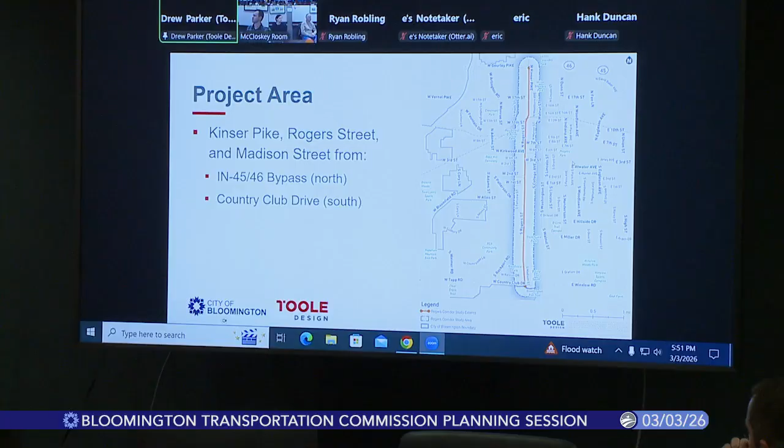Starting with the project overview, Hank covered this verbally, but the project extent we're looking at is the Kinser Pike, Rogers Street, and Madison Street corridor from the bypass all the way down to Country Club Drive. You can see the corridor extents map here on the right.

The way it's been communicated to us, the purpose of the project is to evaluate existing conditions and make recommendations for design changes to improve safety along this corridor. So this is, to us, really a safety project. It may achieve other goals, but first and foremost this is a safety project housed under the Safe Streets for All plan. We really want to focus on the long-term vision for design recommendations, that 10-year window, but also think in the short term about rapid implementation projects we can do with quick build materials to achieve some of those same goals.

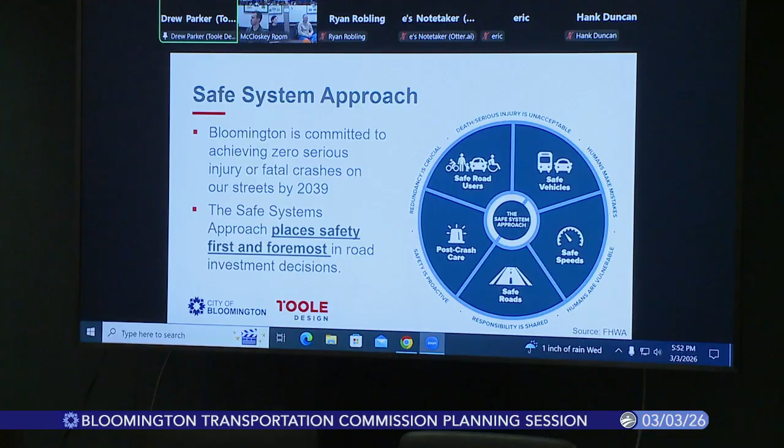Like Hank said, you all have adopted Vision Zero for 2039, meaning we're trying to eliminate serious injury and fatal crashes by then. So this is one corridor within the overall citywide street network where we're starting for this study.

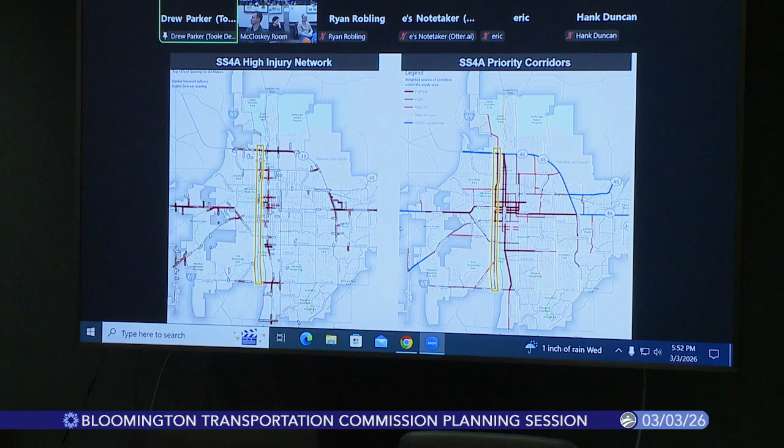Hank mentioned this as well - on the left side here you can see the citywide high injury network, where those serious injury and fatal crashes occur most frequently across the city. Especially along the northern end of this corridor, there's a higher frequency of those types of crashes. When you look at the priority and other factors Hank mentioned, this corridor, especially the northern end, really rose to the top as the highest priority, or highest tier of priority.

To give you a sense of the project overview, we started work in October, beginning with data collection and corridor analysis, which we've just recently completed in a draft form. Also coming up with the vision and goals. Our next steps as the project advances are to develop design alternatives and then move into a concept design, compiling that into a final corridor study.

Like Hank said, this is our first Transportation Commission meeting. We will have a meeting during workshop week, that week of March 23rd to the 27th, and then we expect a few more Transportation Commission meetings later in the spring and summer. Our public engagement will be, like Hank said, focused on that workshop week to get as much engagement as possible all at once. But we'll also have an online survey open for a month, so if people aren't able to attend those events during that week, they'll be able to engage via the project website as well.

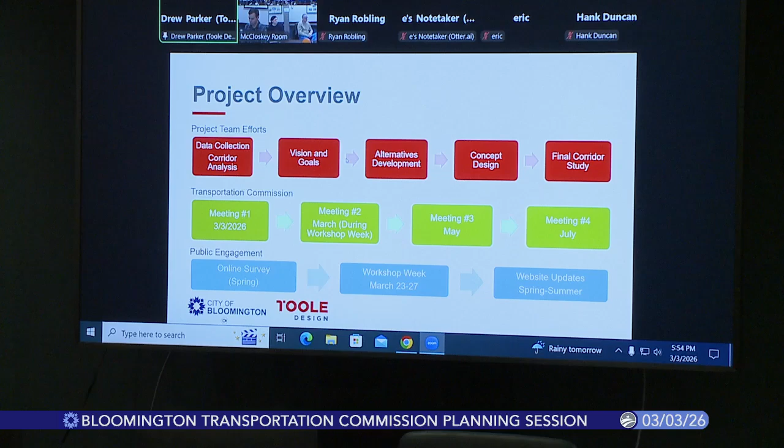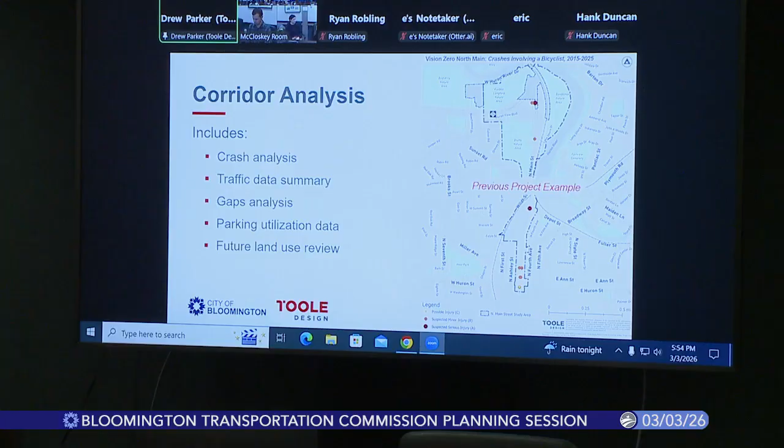I feel like I'm repeating some things Hank said, but sometimes it's good to hear things multiple times, at least for me. The corridor analysis includes crash analysis and traffic data, a gaps analysis, parking utilization data, as well as future land use review. We'll go through that in the second half of this presentation.

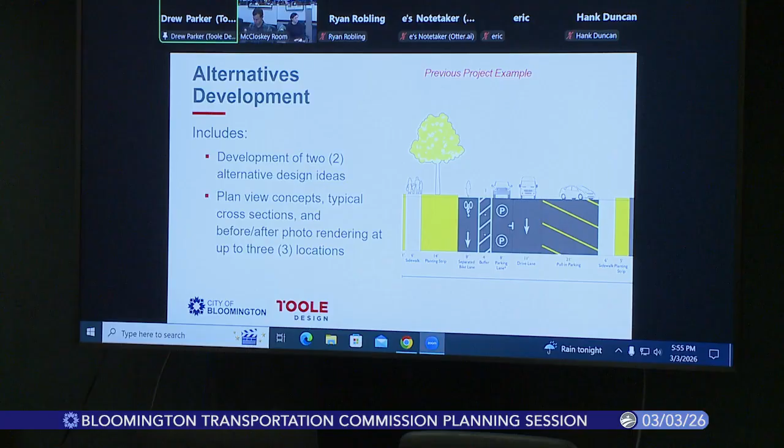For alternatives development, our goal is to come up with 2 alternative design ideas, which could vary depending on different context zones, since it's a really large citywide corridor that differs depending on which section you're in. As we develop those alternatives, we'll create cross-sections - you can see this example on the right, just from a different corridor design project - and come up with multiple alternatives and plan view concepts to show. We'll then evaluate which alternative we think meets the project goals and design objectives the best.

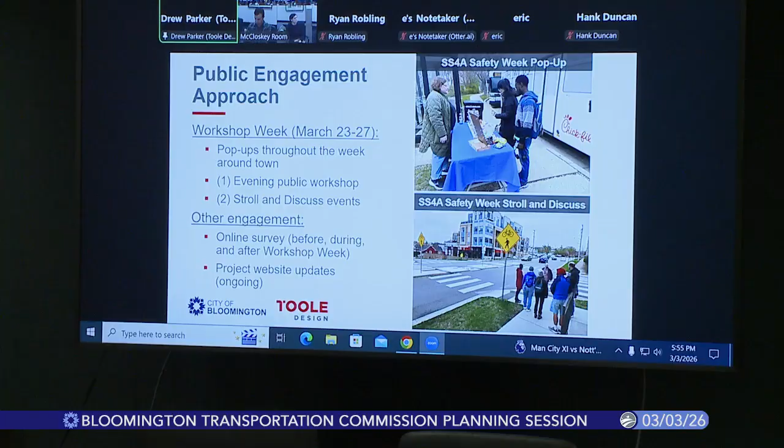And then our public engagement approach, as mentioned, is really focused on the workshop week. You can see these couple of photos from Safety Week for the Safe Streets for All plan, where we had stroll and discuss activities and pop-up activities where we're just trying to meet people where they're at, do a quick 30-second activity, give them a snack, and send them on their way. It's a nice way to get quick feedback if people don't have time to come to a public meeting for an hour.

All right, so that covers the overall project overview at a very high level of what we will be doing from now through the summer. The next section I want to move into is the project vision statement, goals, and design objectives. These are in draft form, statements that we've come up with working with city staff. We're really looking for you all as commissioners to provide feedback on whether you think this is headed in the right direction, and if you agree with the vision statement, goals, and design objectives.

So the vision statement that we've come up with is: the Rogers Street, Madison Street, and Kinser Pike corridor will become a safe, accessible, and connected multimodal street that supports existing neighborhoods, advances Bloomington's values, and guides future growth towards walkable, people-centered places.

So you can see it's really focused on safety first, but there are all these other goals that we're trying to achieve with the corridor study, which is really taking a broad look at the corridor. I'll run through the goals and design objectives, and then we can pause, and I'm happy to move back and forth between these slides to talk about each of these with you all.

So as far as goals, we have 6 goals intended to support this vision. The first is to eliminate fatal and serious injury crashes, which we'll do through street design changes that we know can help reduce the chances of those crashes. We also want to support multimodal travel for all ages and abilities. We know this is an important north-south corridor that connects throughout the city, so we need to ensure our concepts support travel for all modes and for all ages and abilities.

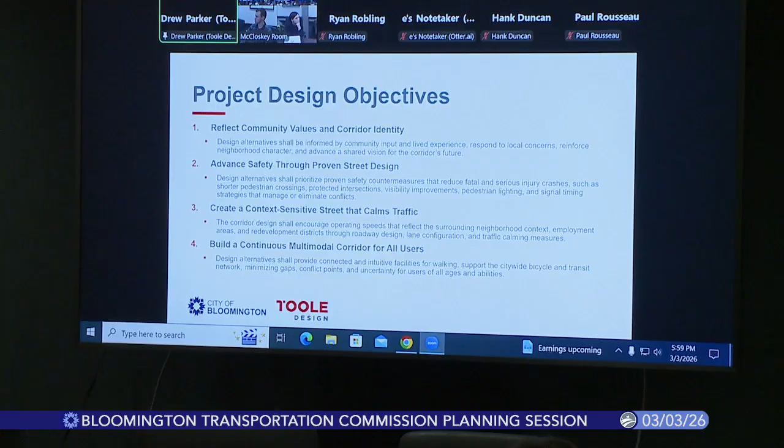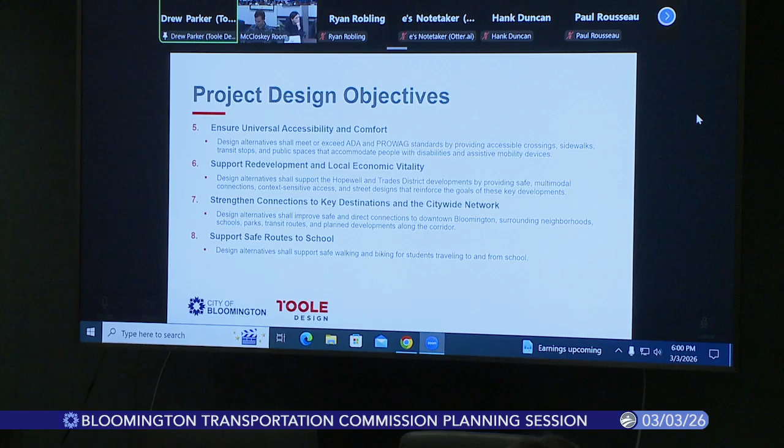The fourth is to build a continuous multimodal corridor for all users. The fifth is to ensure universal accessibility and comfort. The sixth design objective is to support redevelopment and local economic vitality. The seventh is to strengthen connections to key destinations and the citywide network. And the last design objective is to support safe routes to school. Each of these design objectives can be evaluated, and we can say whether or not the alternatives we're proposing are achieving one or all of these 8 different objectives.

The next thing I wanted to mention is that staff have already taken a cut at splitting the corridor up into different context zones. As people have mentioned, it's very different along the corridor depending on where you're looking. So city staff have already, at a draft level, said these are what we think are the 4 different context zones within this corridor.

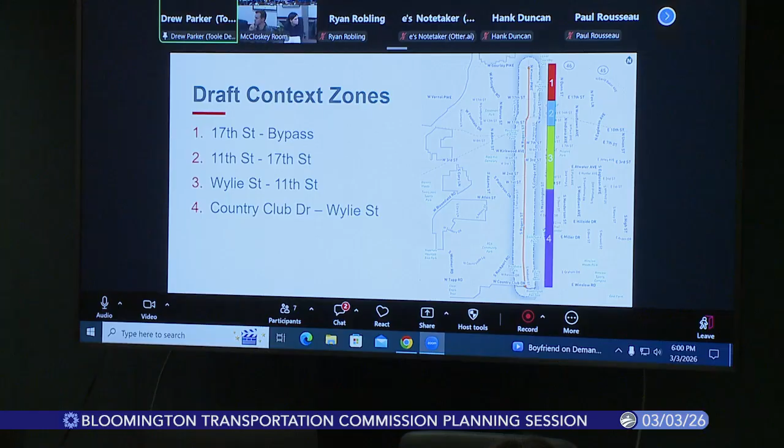The first section is the area north of 17th Street to the bypass. The second area is from 11th Street to 17th Street. The third area is from Wylie Street to 11th Street. And the fourth area is south of Wylie Street down to Country Club Drive.

I know there's a lot of information to throw at you all, but I want to pause there and see if folks have initial thoughts on any of those things that we just presented, and we can start wherever folks want to.

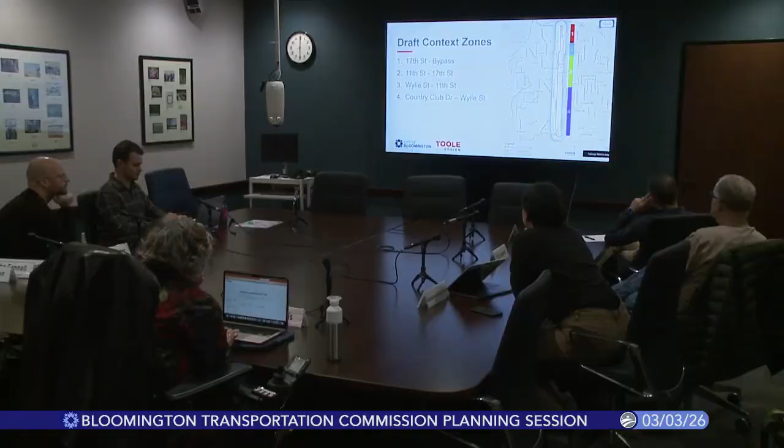May I jump in? Yeah, thank you so much, Drew, for this presentation. Would you mind going back to your previous slide where you show the 4 segments? I think commissioners would maybe just like a moment to take a look at these 4 context zones for just a second. Absolutely.

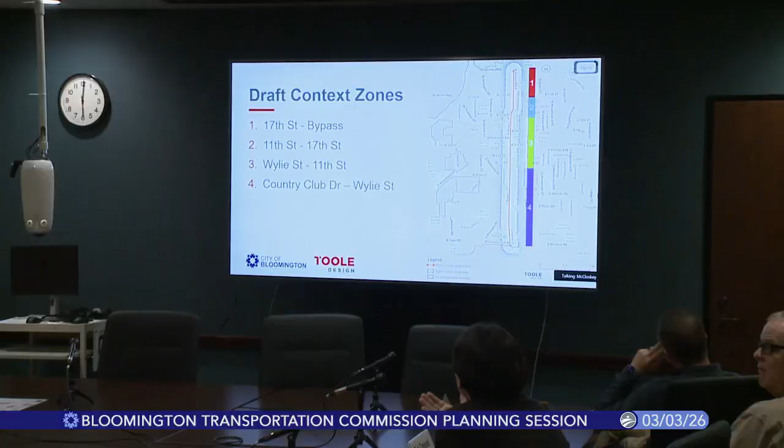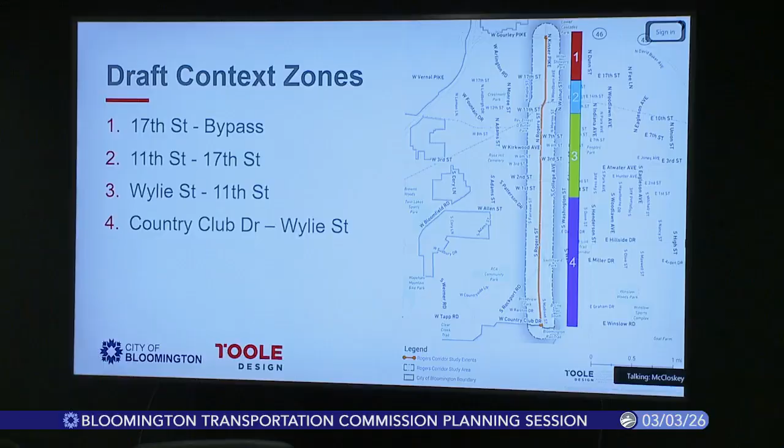As a follow-up, I think I would ask maybe if you can give more context on how they were originated, what is the reason behind them being like that? There's no perfect answer here, and this is very much a back and forth. These are the context zones and this is what we're going with. If you have other feedback, please give it to us. Essentially, how we defined it, I'll start south and go north from there.

From Country Club up to Wylie, it is almost primarily residential. There's some businesses over there, but it's residential, and that's where you see less of that downtown, more urban context, and it feels a little bit more suburban. You have long stretches without crossings in there or major intersections. You have a couple with Patterson, or what is it? Rockport, thank you. But it's not too many.

But then once you get into that third section, the Wylie to 11th Street, that is your downtown area. Wylie is where the Hopewell development begins, where you have the new police station, where you have these businesses coming up, and you have just a much denser urban context going through downtown.

And then 11th Street to me is that barrier of, okay, you are leaving downtown and you're entering more of a residential space again. 11th to 17th, this is a smaller context zone, but to me that is an area that is delineated on both sides by 17th and 11th, where it feels different south of 11th and it feels different north of 17th. And then 17th to the bypass, again, you could arguably combine those top 2, 1 and 2, into one, but to me they just feel a little bit different than each other.

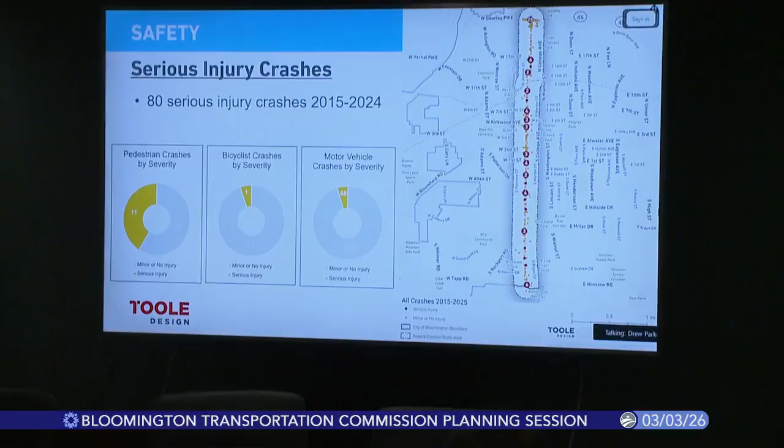There's quite a bit of information here, but we'll start with safety, since that's our number one priority, this being a Safe Streets for All type project. So to start with the safety analysis, we looked in more detail at 10 years of crash data. In that 10-year period, there were 80 crashes that resulted in serious injuries. There were no crashes resulting in fatalities along the project corridor extents. That's a good thing, but there were still 80 crashes resulting in serious injuries.

What you can see from these charts is that crashes involving pedestrians much more frequently result in serious injury type crashes, whereas crashes with bicyclists are a little less so as a percentage, and same with motor vehicle only crashes. From the map on the right, the highest serious injury crash intersection is the bypass intersection - I think that probably comes as no surprise to anybody. But then tied for second is 17th Street and Country Club on the south end.

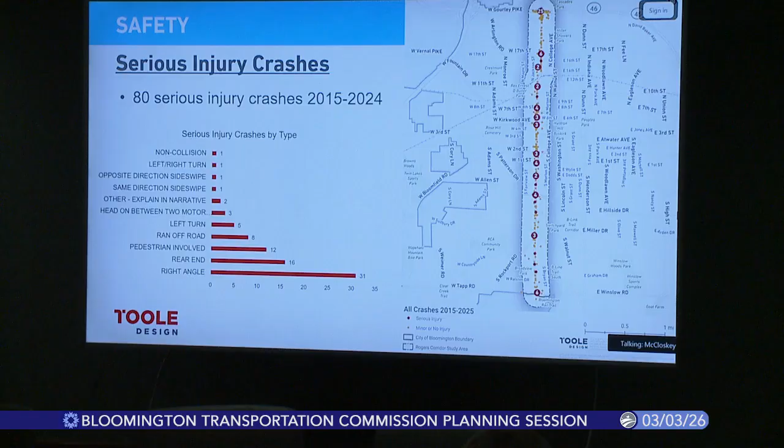I think those are just crashes based on the check boxes on the police report. Yeah, could be. Okay, it's just a couple of them out of a whole list, so not a big deal, but figured I'd ask. Thanks, yeah, thanks for the question.

This map shows the crashes involving pedestrians. 11 of these resulted in a serious injury. It's a small sample size for 10 years, so there's not necessarily a clear pattern, but there were 2 at the bypass, which had the most serious injury crashes. In general, you can see where crashes, whether minor or serious injury, are clustered more north of First Street, which is why that area was a higher priority in the Safe Streets for All plan. Some of that also has to do with more people walking around in that area.

Sorry to interrupt, but is there a reason the data is limited to 10 years? I ask because I have a memory of at least 2 fatalities at 46 and Kinser within the last, maybe 15 years, and I thought that was a bad intersection. But if we know of it, does this only include what's listed in police reports, or if we have information of other injuries, do we include that data? So that's 2 compound questions for you to answer.

No need to apologize. This is just crash data from police reports, so if it's not there, we didn't have access to that data. As for why we looked at 10 years, we typically look at a 5-year window, the last 5 full years of data. We looked at 10 years just to have a bigger sample size, honestly, to try to draw more conclusions. That's why we did that in this case.

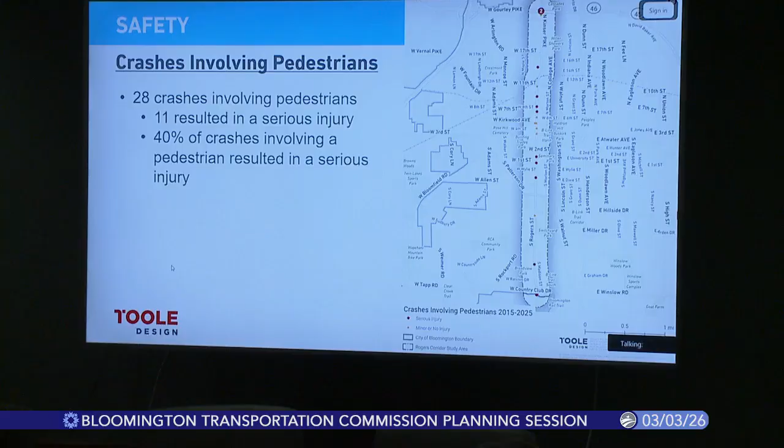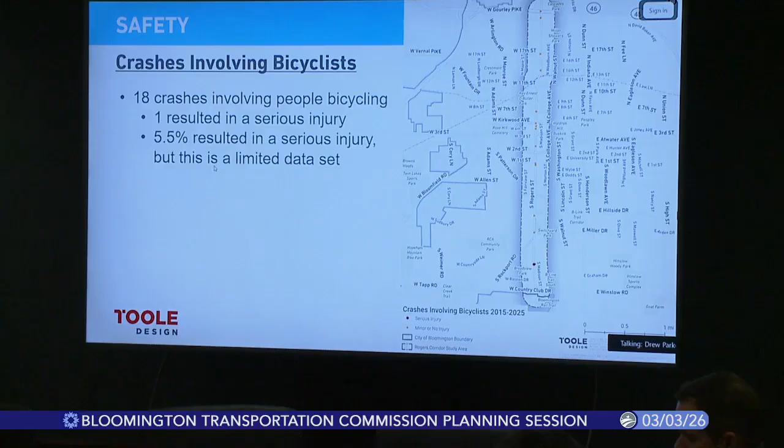Crashes involving bicyclists, there were 18 in that 10-year period, 1 of which resulted in a serious injury, and that was on the south end of the corridor. This is a pretty limited data set, a pretty small sample size to really draw a lot of conclusions from, I think. But our goal is to have no crashes where a pedestrian or bicyclist is hit.

Crashes involving only motor vehicle drivers, 68 of these resulted in a serious injury. Similarly, the bypass had the most serious injury type crashes, and 5% of the crashes during the study period resulted in serious injuries.

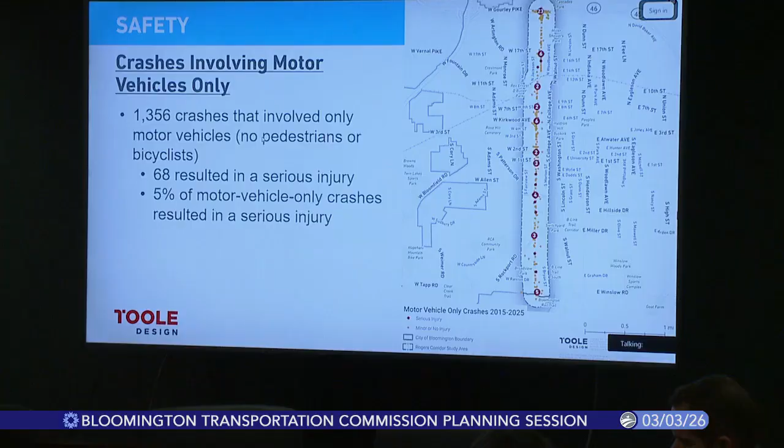Looking more in depth at safety, getting to the systemic safety and priority analysis that Hank was talking about previously in Safe Streets for All. When we don't have tons of crash data or very clear conclusions on where we think there are safety problems based on looking historically at crash data, we can also look at speed data, because we know speed is a factor in the potential for severe crashes to occur.

So in this case for the corridor, we have 2 different traffic counts that had speed data recorded. The map we're showing here shows what the speed limits are in the corridor. North of 17th Street and south of Patterson, currently the speed limit is 30 miles an hour, and in that middle segment, the speed limit is 25 miles an hour.

There were 2 previous traffic counts done, and the city plans to collect additional traffic counts to supplement this. But of the 2 that we have, currently motor vehicle traffic volumes are between 9,000 and 11,000 vehicles per day. In the section between 8th and 9th Street, the 85th percentile speed was 33 miles per hour, and the 85th percentile speed is the speed at which 85% of the drivers are driving at or below that speed, and it's typically used as the speed to set the speed limit.

The other count we have, the speeds are a little bit higher. Down between Hillside and Wilson Street, south of Patterson, the 85th percentile speed was 38 miles an hour. So from a safety perspective, these are pretty high speeds for areas where there's pedestrians and bicyclists crossing, and those higher speeds create the potential for more severe crash outcomes should a crash occur.

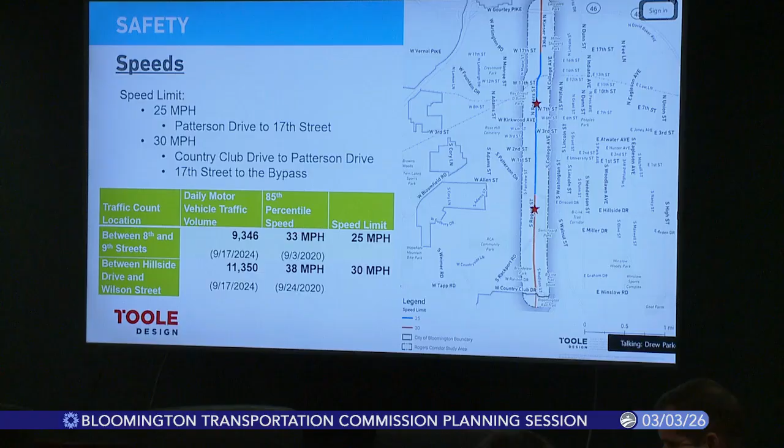Looking more in depth at the motor vehicle traffic volume, we like to look at the hourly capacity of streets to understand how existing traffic volume compares to the capacity of the street. What this chart shows is at that location where the traffic volume is a little bit higher between Hillside Drive and Wilson Street, the capacity of a signalized 2-lane street is 720 vehicles per hour per direction.

Because there's turn lanes, we really consider this to be a 3-lane signalized corridor, which is that green line, at 864 vehicles per hour per direction. Breaking down that traffic count, the traffic volumes are well below the carrying capacity of the street. Typically with a 2-lane street that has left turn lanes, the upper limit of motor vehicle traffic volumes is about 25,000 vehicles per day. So even with that higher volume being 11,000, we're significantly below the capacity of a two-lane street with left turn lanes at intersections.

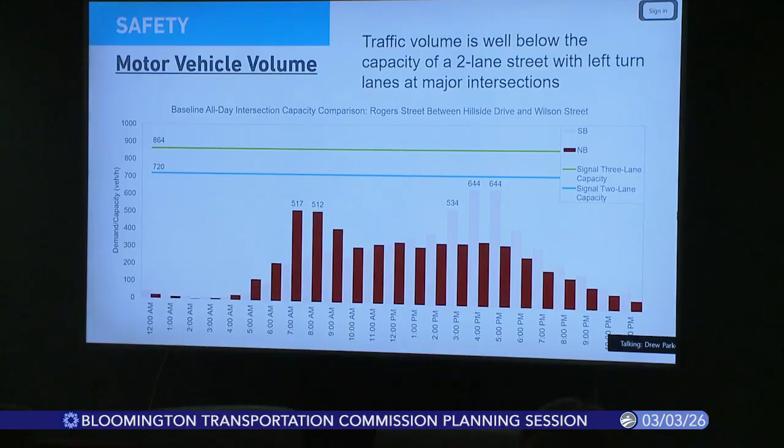One reason we like to bring this up is because when there's excess capacity, or the volume is significantly below the carrying capacity, that means in off-peak periods, people can actually speed because there's no other cars to get in their way. We know that can be an issue in some communities. But the takeaway point here is that the traffic volume is significantly below the carrying capacity of the street.

We also mapped existing sidewalks and missing sidewalks along the corridor. For the most part, there are sidewalks all along the corridor, but when you get north of 17th Street, there's a couple stretches that have missing sidewalks on one side of the street or the other.

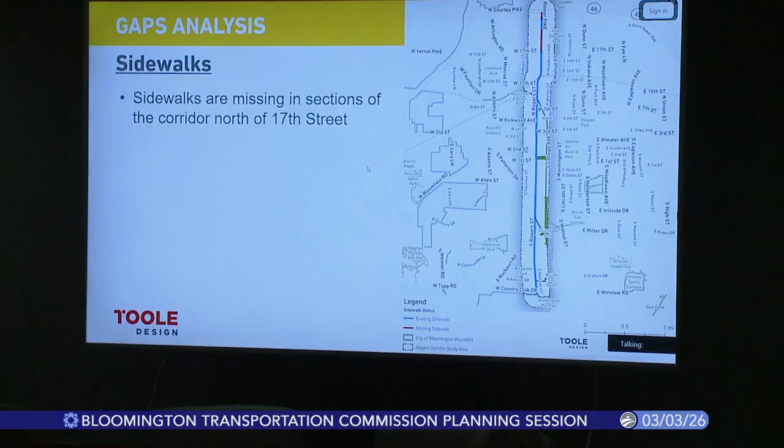We also mapped all of the existing bicycle facilities. South of Patterson, there's a multi-use path on the west side of the street, but north of there, there's not really any bike infrastructure. There's occasional bicycle lanes, which are sometimes only on one side of the street, and there's no bicycle all ages and abilities connection that goes across the railroad tracks on the north end.

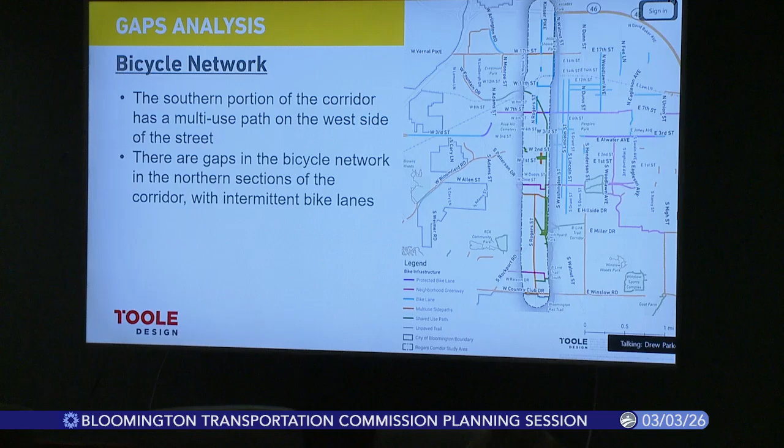We also mapped the existing pedestrian and bicyclist crossings. This map shows all the locations of crosswalks along the corridor as dots, color-coded by what type of crossing infrastructure there is at that crosswalk: either rectangular rapid flashing beacons—I think there's one at 4th, and one other location on the corridor—or a crosswalk with a crossing warning sign, just the orange pedestrian crossing sign, or a crosswalk at an all-way stop, or a traffic signal.

Looking at all those crossing opportunities, we also mapped the distance between them, and divided that distance by 2 to say, if you were halfway between one of these crossing opportunities, what's the maximum distance you would have to walk to get to a pedestrian crosswalk. You can see there's a couple locations with pretty long stretches between pedestrian crossing opportunities. We picked that threshold of 900 feet as the top threshold because that's about a 5-minute walk for a typical walk speed.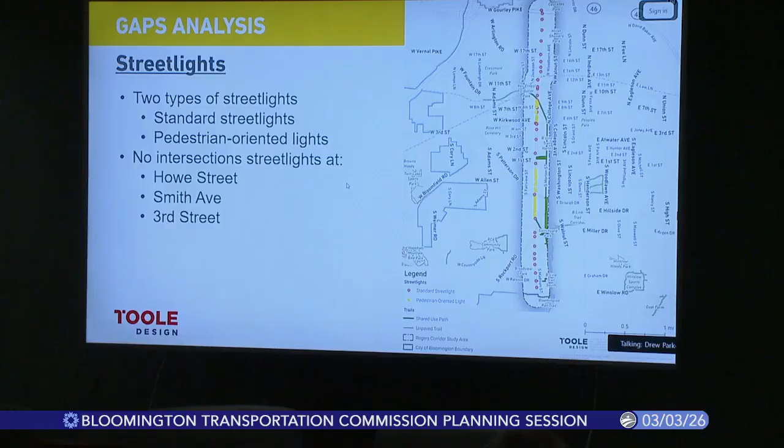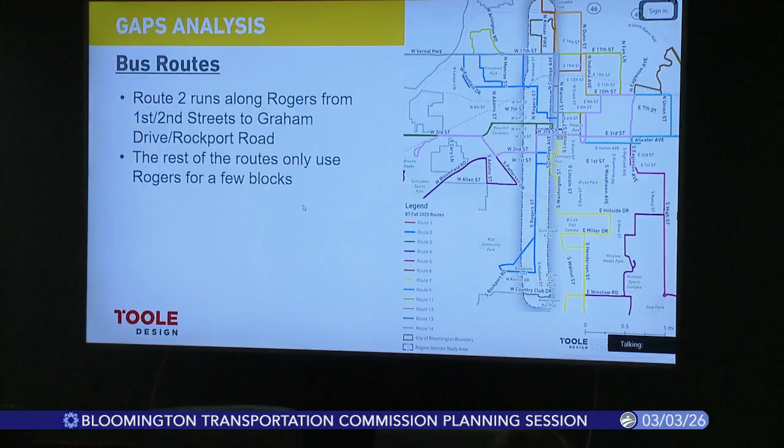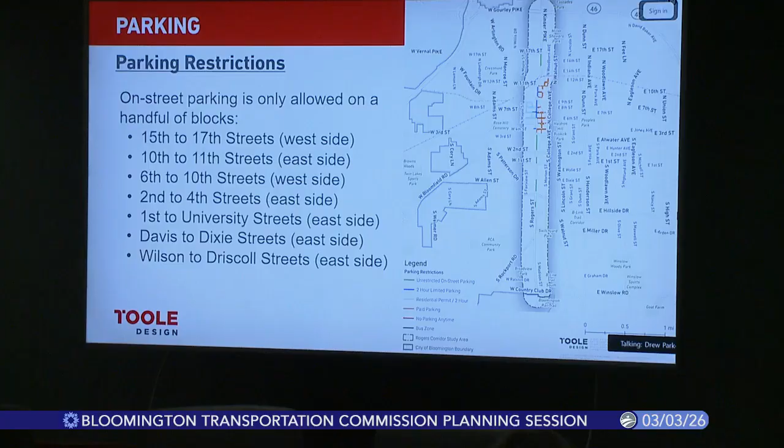We also looked at existing parking restrictions and on-street parking opportunities along the corridor. There's a very limited amount of on-street parking allowed along the corridor. Most stretches of the corridor don't allow on-street parking, but there's a handful of pockets of on-street parking where parking is allowed.

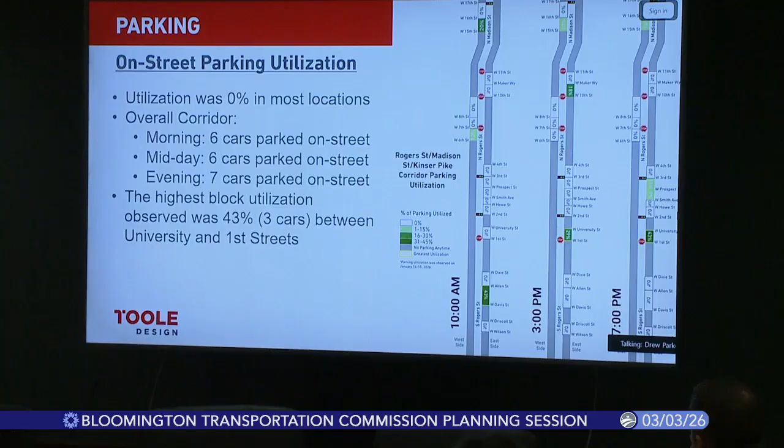We also did a parking utilization survey just to see how much this on-street parking is being used along the corridor, and the answer we found is that it's very underutilized, almost not used at all. We looked at three different periods: a morning, a midday, and an evening survey period. The maximum number of cars that were ever parked along the corridor for the entire stretch was 7 cars, in the evening period. There was one block between University and 1st Street where, in one period, there were 3 cars parked. Overall, the takeaway is that though there's a little bit of parking permitted on this corridor, people aren't really using it hardly at all.

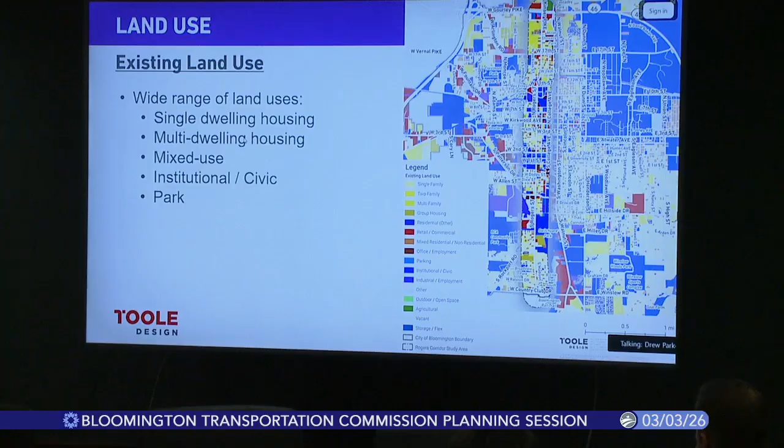The future land use plan includes a proposed urban corridor on the northern end, downtown and the downtown area, and then most of it is mixed urban residential, but then there's also pockets of institutional and civic, employment center, and parks and open spaces.

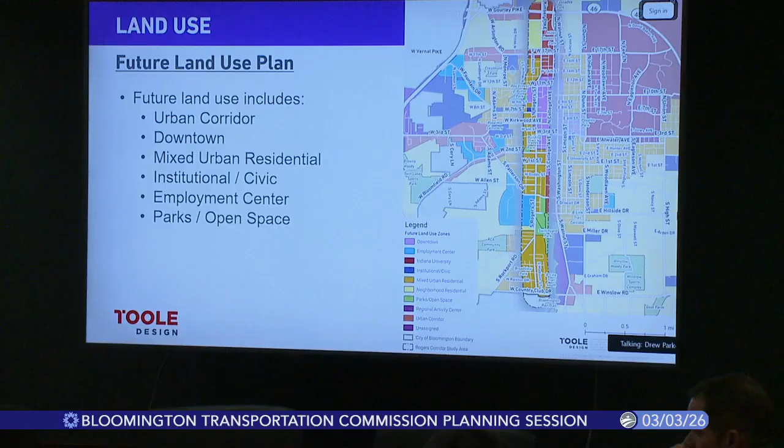And then the last land use thing that we mapped is just known ongoing and future development areas. There are really three major ones, which are the Aspen Heights redevelopment, the Trades District, and the Hopewell redevelopment. Those are three major areas that are redeveloping currently and in the future, and we just want to keep that in mind as part of the study and how the street design can support those developments.

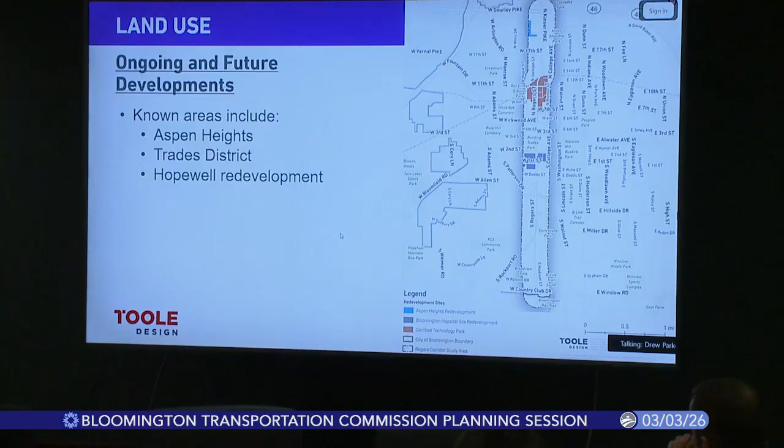So all that being said, what we did is we pulled together seven key findings that we think are important to take away from all this analysis. The first one is that the Rogers Corridor is a top priority for safety improvements. In the last 10 years, there were 80 serious injury crashes, and 11 of these serious injury crashes involved a person walking. So it makes sense that it was a high priority corridor in the Safe Streets for All plan.

We also think that speed is likely a contributing factor to some of these safety concerns, with 85th percentile travel speeds being 33 and 38 miles an hour, which are significantly higher than the posted speed. And we know at that upper end, 38 miles per hour becomes a pretty dangerous speed for crossing pedestrians.

Another finding is that some areas of the corridor are really comfortable and walkable, but outside of those pockets of nice areas with street lighting and a really nice multi-use path and sidewalks, there are quite a few sections that are less pleasant to walk along and have missing sidewalks or deteriorating sidewalks and not great pedestrian lighting.

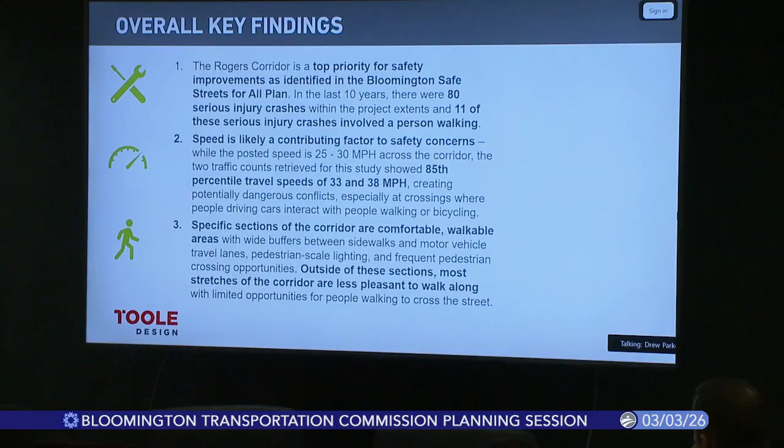Our 4th key finding is that the southern portion of the corridor has a nice multi-use path on the west side, but moving north there are gaps in the bicycle network, and there's no low-stress bicycle option to connect over or under the railroad tracks in this stretch.

Our next key finding is that on-street parking is allowed only along several blocks of the corridor, and utilization of this very minimal on-street parking is very low, in most cases 0%.

Our 6th key finding is that there are key redevelopments happening, and improving the streetscape design can support the city's goal for these new developments to support safe streets and walkable access.

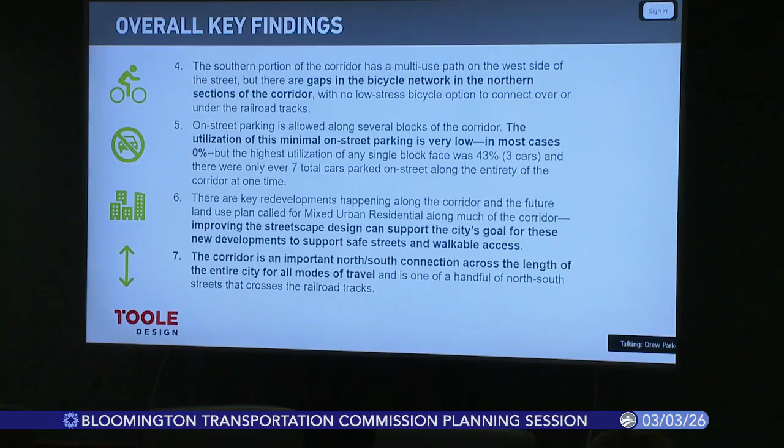And then lastly, one thing we think was a key finding is just that this corridor is an important north-south connection across the length of the entire city for all modes. So this is one of those streets that everybody has to use no matter how they travel to get through the entire city, north to south.

So that's a summary of our analysis findings thus far. I'll open up to questions, and I'm happy to jump back to any slides as needed.

Mr. Chair. Oh, yes. Thanks very much, Drew. A couple comments, questions, corrections.

The slide about street lighting was interesting to me. I just want to note there are, in fact, intersection streetlights at Howe Street and Smith and 3rd Street. I know that because I spent a long time trying to get Duke Energy to reinstall the streetlight at Howe. It was improperly removed when Duke replaced a utility pole, and they did not install a new streetlight until I filed a report to get that reinstalled.

There's one at Smith, but it is frequently burnt out, so it was probably just not illuminated when somebody was looking at that one. And then 3rd Street, there is now a streetlight there, but there used to not be one.

And then another comment on the 3rd Street intersection. That's going to be a major intersection because that's a high pedestrian volume, high vehicle volume. There is a street light there, thankfully now, I think at the southeast corner, but someone crossing the street on the north side or the east side of that intersection is crossing 5 lanes of traffic, so it's a big intersection. There's just one street light there.